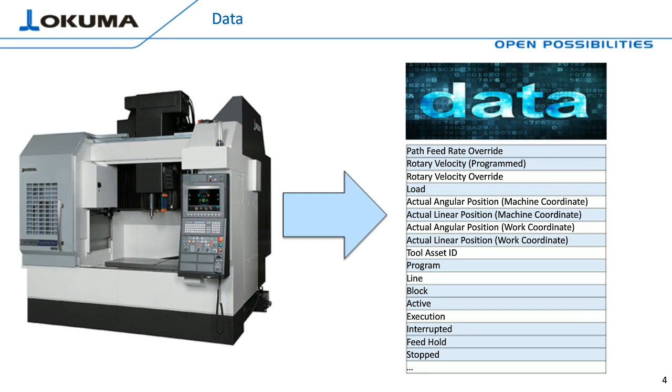Okay, so we're talking about data that links the physical world, in our case a machine tool, to the cyber physical world. Let's just take a quick look at what that actually means in the workplace. So when we talk about the physical world, we're talking about OT, operational technology. So think about machines, HMIs, PLCs, monitoring systems, physical things that run your business. When we look at the IT side, information technology, we're talking about the server systems. We're talking about networks and cloud infrastructures, the actual data storage devices.

Okay, and in the past, we had this nice brick wall right in between the two. What these technologies, what IIoT and Industry 4.0 do, are actually knock down that wall. They break down silos. They force a communication flow between these two systems. Simply put, we're converging OT and IT resources. So if you have a machine that interconnects the shop floor to your engineering system, to your management departments, you've just created a dynamically stable process, hopefully a more stable process.

So this forced flow of information enables better shift-to-shift communication, better tracking, trending, reporting of problems, and hopefully making jobs easier for you, because that's what we're after here. So really, why wouldn't you want to improve these uncontrolled processes when this information is readily available to you? And oftentimes, it's actually right in front of you.

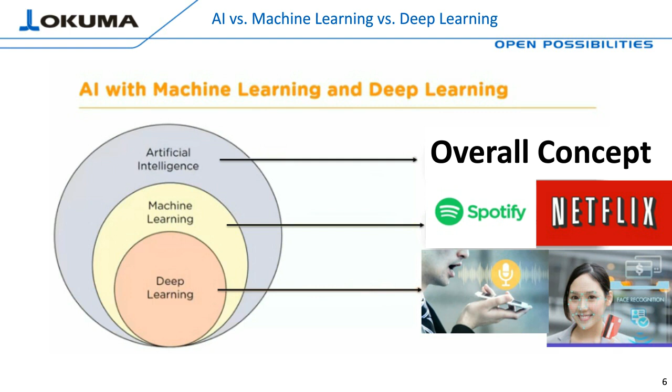But why should these even matter to you? Why are these important? Because, bottom line, what are we after? ROI. They can help you make money. Like Jerry Maguire, show me the money, right? So that's number one here. So that's why you should really care about Industry 4.0 and IIoT, because using these practices has been proven to increase revenue, to change your processes, and to help you realize things that you had no idea could be done before. So that's number one.

Some other things. Number two, it's probably going to utilize assets or resources that are already owned, that you already have control of. It just makes a scalable system for processes that you couldn't even measure before. Okay, so that's important. It also helps you identify potential issues and kind of eliminate any kind of guesswork that might have had to be done in the past. This is actually a true model of automation. It's not just a similar concept. So, the definition of automation, making an apparatus or a process perform a function with minimal human assistance, minimal human intervention. It's software automation at its finest, okay?

Number three, the ability to rapidly adapt to changing conditions. So providing a means to anticipate conditions and to project results. So you can use this as a tool to make better business decisions. That's a big one as well. And number four on here, I think this is also fairly important as well. I think it's an excellent means to attract younger generations with these new technologies and tools.

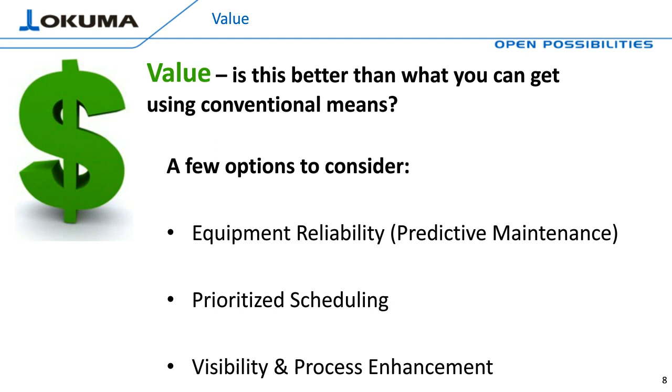All right, the hidden factory. The first thing that you see, probably one of the most visible things you see when you walk out onto the production floor, is this shop floor productivity. You see operators out there running machines, making good parts, hopefully. But you might think, how can we improve operations to keep them busy, keep those spindles turning? That's the tip of the iceberg here, because it's easily visible, but it's something that's important nonetheless.

What you might not see is below the surface, what we're calling the hidden factory here. So what's below the surface? What's the bigger chunk of this iceberg? Digital metrics. And when I say digital metrics, I'm talking about OEE, asset health, asset life remaining, and diagnostic capabilities.

So just to talk about those for a second, when we talk about OEE, we're talking about utilization ratio. We're talking about maximizing your production rate. So finding an optimum balance between cutting speeds, feed, depth of cut, tool life, that hopefully overall decreases your unit production cost. One metric. We're also talking about performance, unit production time. How quickly are you pumping out those parts? Cutting time versus non-cutting time, reducing setup times. Here you might find some opportunities for automation or upgrading your equipment. So that's performance as a metric.

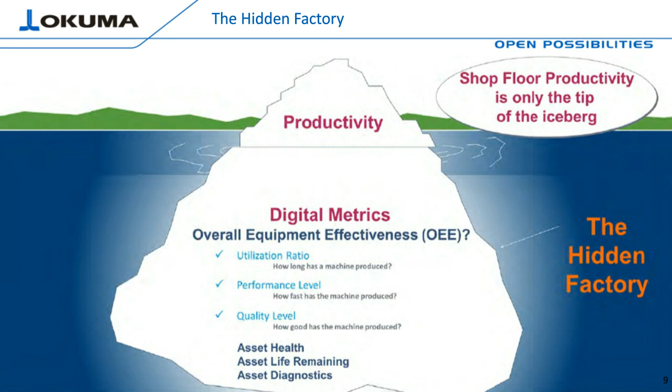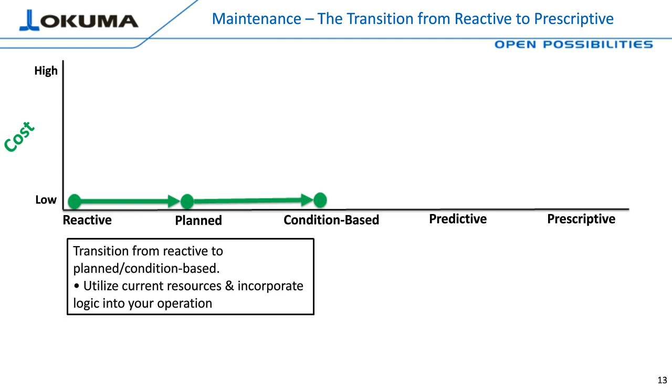let's move from condition now to predictive. So this transition, again, you don't need to change your process. Some of these same rules apply, but now you're actually using raw data to make informed decisions, okay? Here's where a potential cost comes in, okay? So here, you're probably going to need to implement something. You're going to need to partner with someone. You're going to need vendors that can provide some type of analytic software to help you use what you've got, okay? So that's where you can incur some cost.

Now let's move from a predictive to a prescriptive maintenance system. All right, now this is where you're going to see a lot of change. But this is also where the most growth can occur. Here you're going to gain insights on everything that your business has been doing. The prescriptive analytics provides you with data-backed decisions that you can weigh against various models. So here it's actually taking learned models and comparing to previous results. Again, added cost here, but you can step through the process here to lead to that prescriptive maintenance practice, okay?

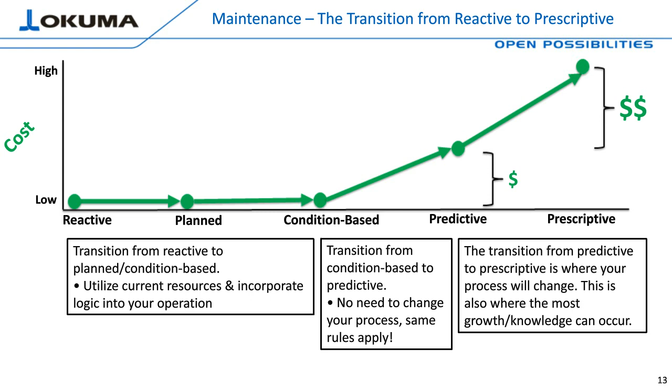All right, let's go through each of these really quick. Reactive maintenance. Unfortunately, a lot of us live in this world. You walk out onto the shop floor, you look in the lathe, and the turret is in the chip pan. I guess it's time to call the maintenance team. Not ideal, right? We want to move away from this reactive environment to more of a proactive system where we can see these kind of issues hopefully before they happen, before it becomes a major issue, because you'll have unplanned downtime, costly repairs for the machine.

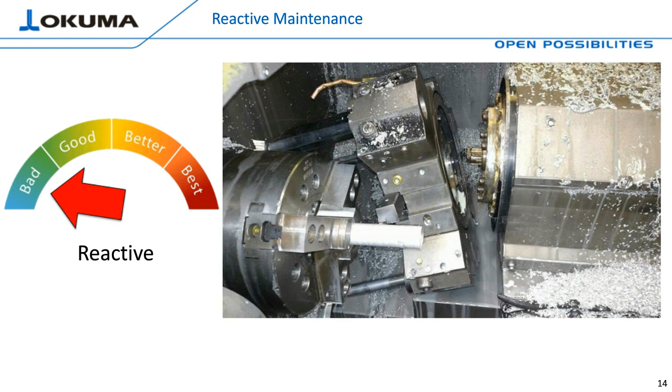The only benefit to this, I guess if there is one, you're keeping your service department on their toes, so there's that. I'm sure they don't appreciate it, but I guess that's a benefit.

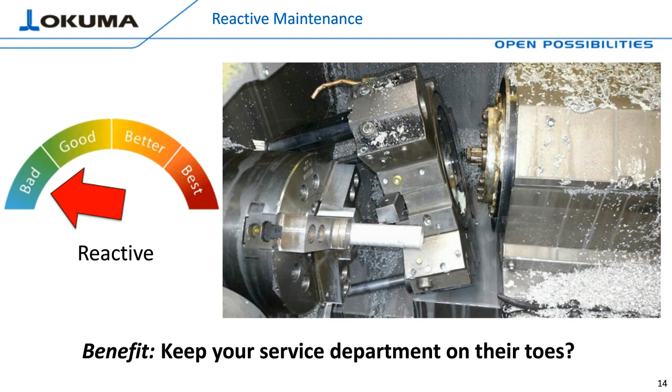Okay, let's move the dial. Let's go into planned. So if we want a planned maintenance system, now we've got something that we can work with. Now every 3 months or so, you're checking hydraulic pressure, you're checking the oil level, you're checking coolant concentration, you're following some type of guide system. You might follow the manufacturer's recommended maintenance schedule for some items. Step in the right direction, okay?

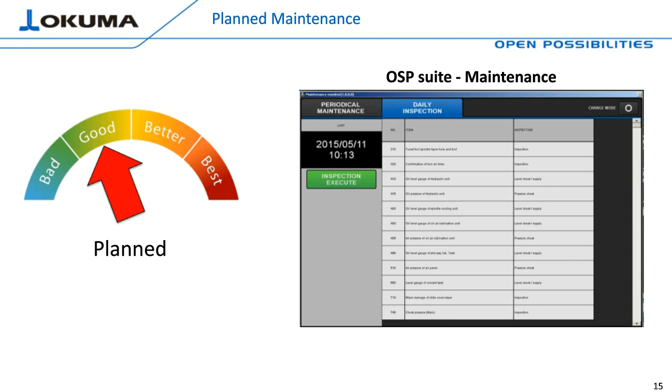A benefit on your Okumas is it's free software on new machines. So it's actually included on new Okuma machines. If you've got a machine that was produced in the past 10 or 15 years with a P-series control, you can actually download a free app from our app store and install it onto the machine for a planned maintenance system, okay?

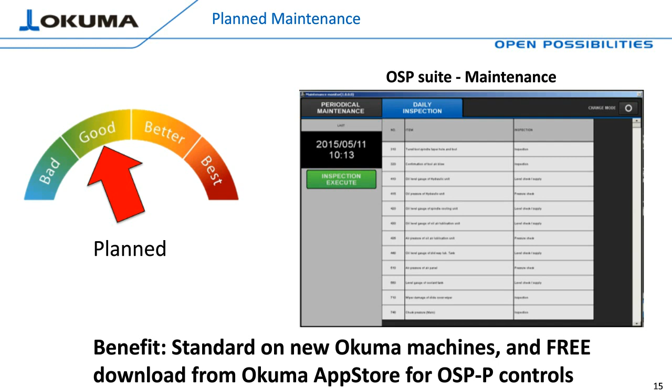If you're looking on the new machines, this software, as you see on the screen, is called OSP Suite, and it's the maintenance feature of OSP Suite. It gives you exactly what we're talking about, a list of things that need to get done or PM'd at a set interval, okay? So we're moving the dial here. Let's continue to do that. Now let's move into a condition-based maintenance system.

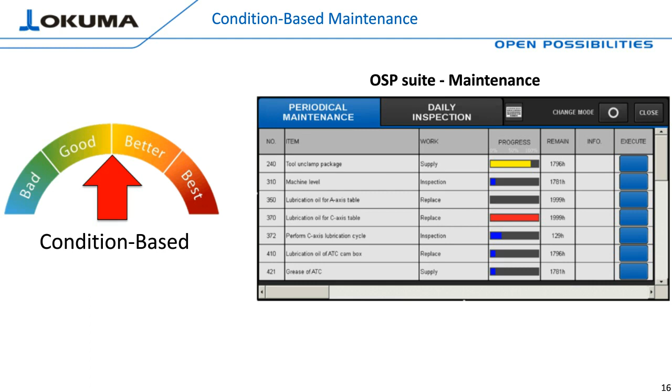So now we're actually looking at machining time or part count or tool wear. Okay, here's a step in the right direction as well. So another benefit to you for the Okumas, again, free onboard software. So this comes free to you with the purchase of a new Okuma, again in the OSP Suite maintenance system. So here we're tracking the time interval for all of these components, all of these features that need to be maintained every once in a while.

Now we've got metrics or time in place that will alert you when that component has met its life cycle, okay? So again, we're taking steps in the right direction. Let's keep going with this.

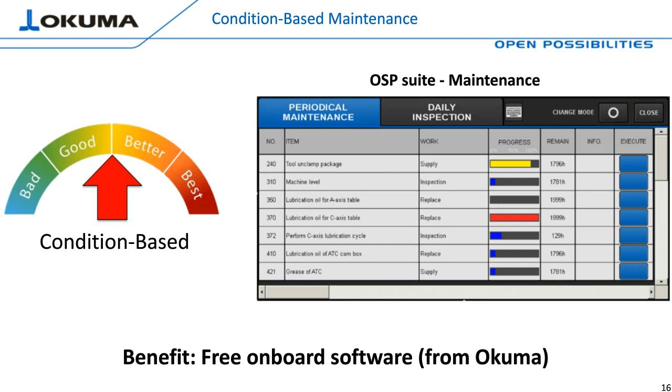Predictive maintenance. Okay, now we're getting somewhere. Now we're getting better. So now we're talking about connected sensors. What I'm showing you on the screen is the Okuma monitoring and control system. Basically, we can plug in analog or digital sensors, take your pick, into the OSP control and set user limits on all of these values. That's great.

But along with that, what you'd want to add would be a preventative maintenance service, or the analytics that take that raw data from the machine tool and analyze it. So you've got pre-defined constraints on the machine tool with some type of analytic system. Now we're looking at predictive. So that's live readings plus analytics.

So using these connected sensors, you can trend vibration, lubrication, acoustics, any kind of motor conditions, current, pH, concentration, temperature mapping, take your pick. Like I said, you can plug in any kind of analog or digital sensor into that system. So there's your predictive maintenance system.

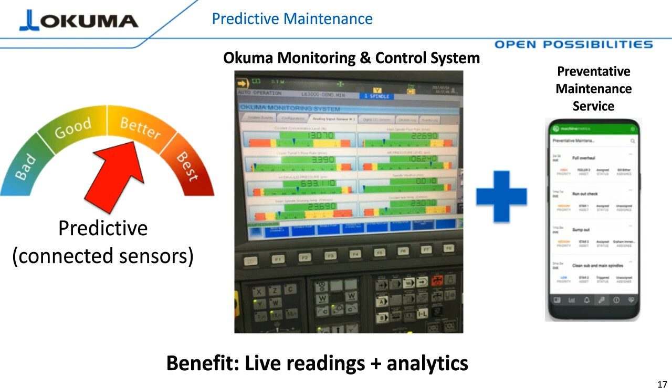Let's move on to the best we've got, prescriptive maintenance, probably a new term. So when we talk about prescriptive, we're talking about AI-based, specifically machine learning. And this takes diagnostic models from a cloud service and basically compares that with your machine tool. But it learns as you use it.

So we've got these technologies called spindle AI and ball screw AI. Again, technically it's machine learning, but we're calling it AI because it is under the category of AI, for detecting failure patterns, to eliminate failures, to help you to be proactive with maintenance processes. So now we're actually able to predict when that ball screw is going to fail before it happens.

Okay? So using embedded sensors, using this AI diagnostic model with this cloud service, you're able to get these alerts before something happens. So this is what we talk about when we say prescriptive maintenance. So it uses machine learning to predict failure before it happens. Okay? So there's your prescriptive maintenance system. So hopefully you'll take some steps here to see if you can move from more of a reactive to a prescriptive maintenance system.

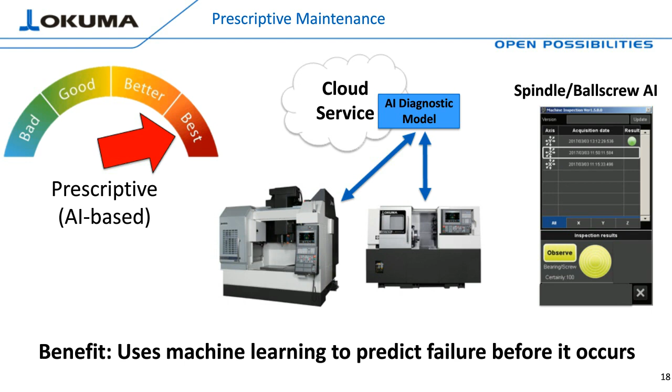All right, next topic, Okuma Connect Plan. And what we're talking about here is operator productivity and incorporating some of these preventative maintenance procedures and making it visible to you. Here's a breakdown of what the Okuma Connect Plan can do for you. So this is making everything more visible to you. It's a very reliable method to carry out any kind of preventative maintenance and help you prevent unexpected downtime.

It gives you a basic layout of all of your machines, so it's a quick view of your shop floor. It gives you a summary of all of the machines, so basic operation, green, yellow, red. It gives you a list of each machine's status, and I'm going to get into these features here in the next couple slides. We'll break down what this software looks like. But it also gives you the ability to review and compare machines and export all of this information as well.

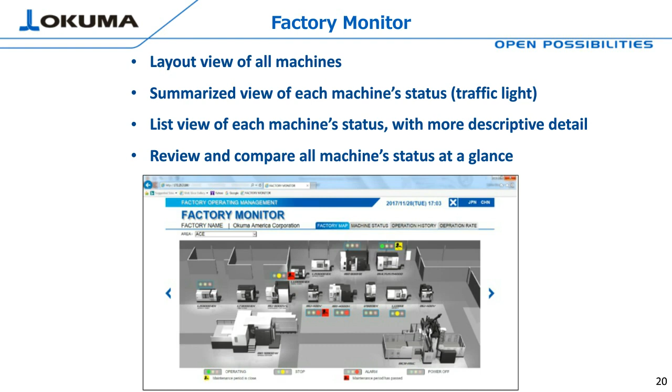So let's just take a look at what this Connect Plan software looks like. First off, you have this factory map. So like I said, green, yellow, red, a quick indicator of what's running, what's not. Another thing that you can visualize from this factory monitor display here is which machines need PMs. So very quickly, I can see right here in the middle of your screen that red icon, that red oil can looking guy in the middle of the screen.

That means that a maintenance item is past due. You're going to want to take care of that immediately because there's a PM that needs to be done. If you saw a yellow icon there on the screen, that would mean there's a PM that needs to be done next week or in the next few weeks.

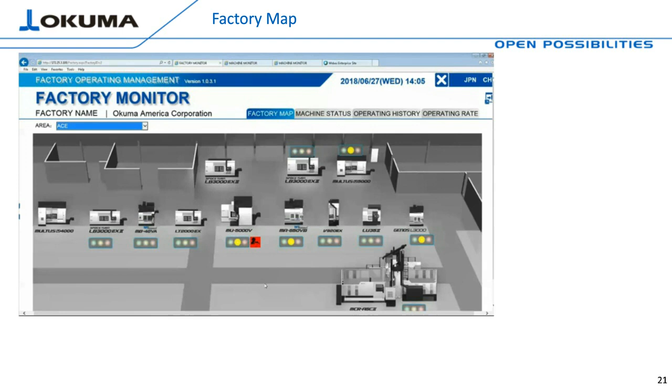So that way you're able to actually plan ahead of time, to plan downtime before the machine goes down. Okay, so there's kind of a nice view that you can use to implement into any kind of preventative maintenance system. You can also customize that view, so if you didn't like that view, you could literally take pictures of

different areas of your shop. So you can really break this down by process, by area, by line, and connect various areas of the shop into the system and view it how you wish. Okay, so that's the factory map.

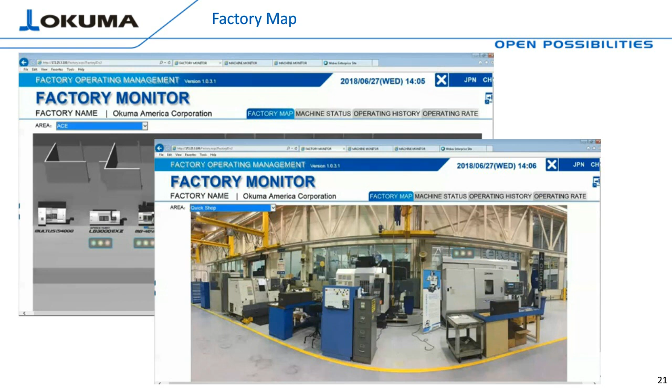Machine status. We've got a lot of different reporting capabilities in this system, and this is just one of them to easily locate underperforming machines. So right away, you're going to come to this page and see the machines that are highlighted in red. One's in an e-stop condition, and the other one has an alarm. You're also going to easily see which machines are running, which are not, and the operating rate of each of these. So it's a quick view of the status of each of these machines.

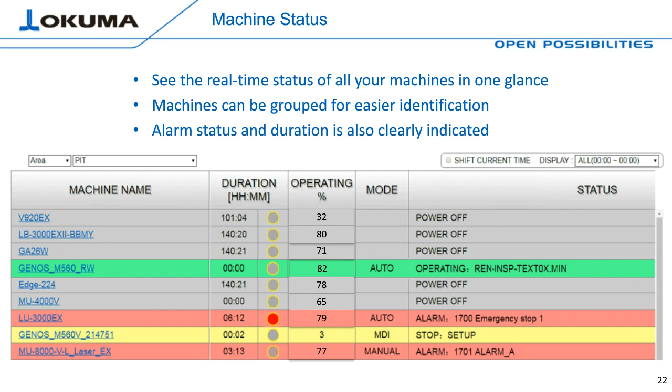And you can also quickly see which alarms have occurred on each of these machines as well throughout the course of the day, the month, the week, the year. Okay? Next is operating reports. So again, there's a lot of reporting capabilities in this. This is another one that allows you to see runtime, alarm time, and stoppage time. Also cutting and non-cutting time from today, from yesterday, from whenever.

So what's important about this is if there is a stoppage, it also provides another level of detail. It provides some granularity to that stoppage. So it tells you that the machine was in setup mode, or it was in a standby mode, or it was in maintenance. It tells you why that stoppage has occurred.

So obviously you're going to want to look at this and figure out how you can reduce setup times from looking at this information. You're also going to see cutting and non-cutting times. So you're also going to try to reduce non-cutting times to bump up your OEE. Okay, so that's operating reports there.

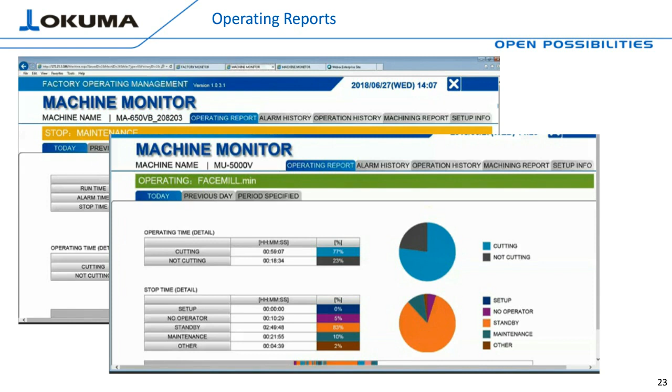Another great feature about this Connect Plan software is the ability to drill down into machines and find out what happened, to trace those conditions that led to a machine stoppage, so that you can minimize the occurrence of reappearing alarms in this case. So I'd go to this page, this alarm history, and I'm going to be able to see all of the alarms that have occurred for this specific machine.

Okay, so if I would click on one of those alarms, it's going to give me the detailed information about that specific alarm, as you would see from the machine control. Okay, so I would also be able to see the alarm code, how many times it's happened. You're going to want to reduce the amount of alarms that are happening, but this is a very quick indicator to tell you what's going on at the machine tool level. Okay?

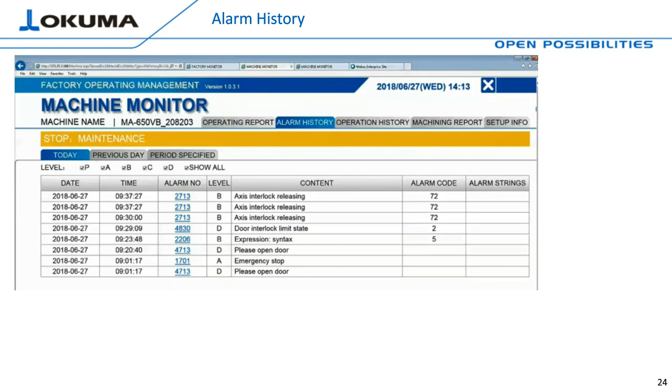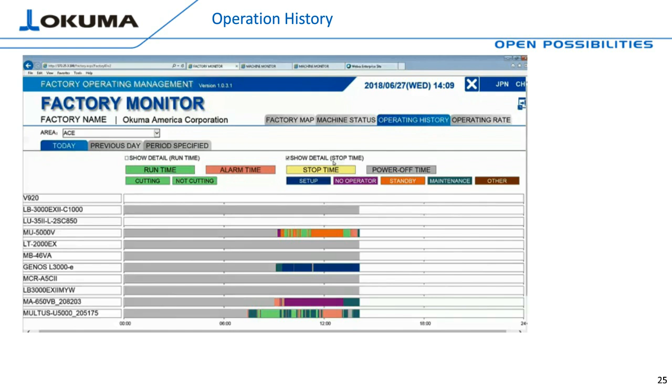And then operation history. I already said we can really drill down into the machines and figure out what's going on at the machine level. This is an overall view, but if I were to click on one of those machines, I would actually be able to see every single button that that operator was hitting on that machine. Every single offset that was being made on that machine through this system.

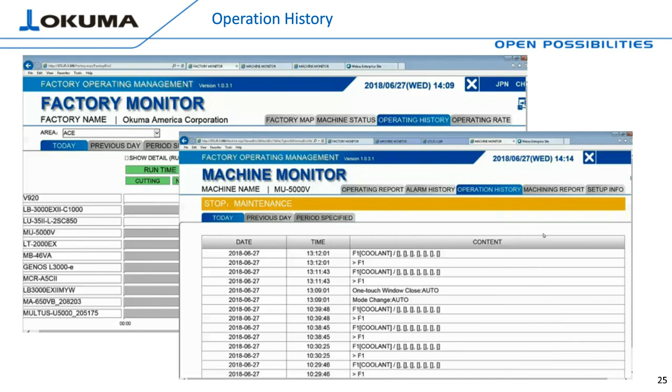Okay? So I can go through and figure out what had happened to cause that crash, or why setup time took so long, by drilling down into machine-specific conditions. It's also going to tell you who was logged into the machine, by the way, which is probably pretty important.

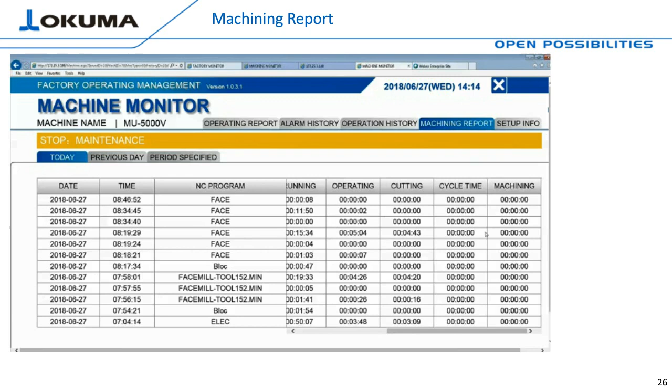And another metric, another report, I should say, would be machining reports. So you get a list of each machine's last program that was ran, how long it ran, the cutting time, non-cutting time, machining time, lots of great information. But what you can do with that is compare it against previous run states. So I could take a machine from this week.

So I would take this week's data from that machine tool and compare it to last week's. I would be able to compare runtime against alarm time. I guarantee you're going to see some correlations there between runtime and alarm time. So it gives you a comparison tool from past history so that you can easily check the effect of any kind of improvements that have been made. Okay? So another great reporting tool in this system.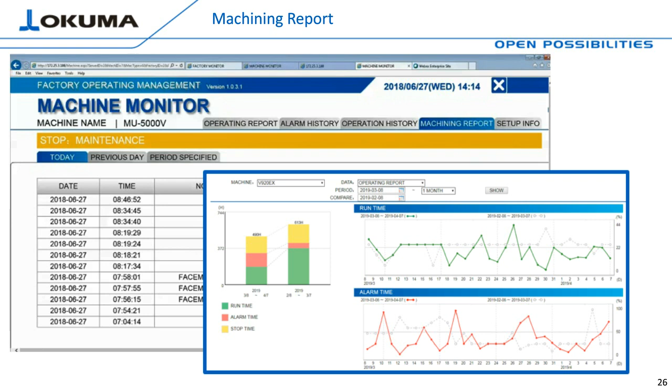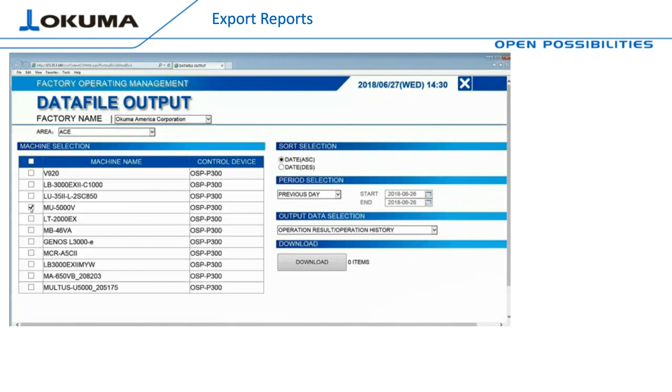And like I said, you can export any of these results. So I can take any machine, any one machine, or the entire group of machines and export all of those as a CSV file or as an Excel file, and then take that information into your ERP system, your management system, what have you. So you can export it as a customized report for any kind of analytics that you'd want to perform after the fact. Okay, so very easy to do as well.